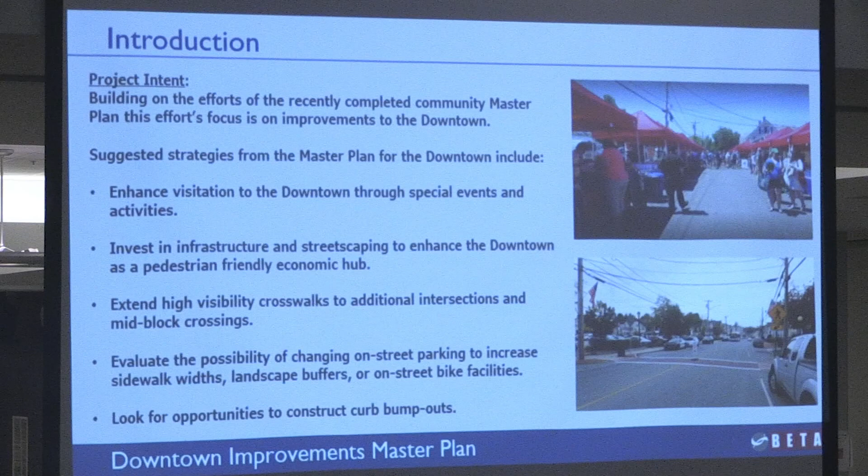The project intent is to come up with improvement schemes and a master plan for improvements to the downtown. A lot of that comes out of the community master plan you just recently completed, and within it there are elements that focus primarily on the downtown—strategies including enhancing visitation through special events and activities, and investing in infrastructure and streetscape enhancements for a pedestrian-friendly downtown.

Invest in infrastructure and streetscaping: extend high-visibility crosswalks to additional intersections and provide mid-block crossings. Evaluate the possibility of changing on-street parking to increase sidewalk widths and improve traffic flow, and also to possibly make the streets more friendly for biking. Look for opportunities to construct curb bump-outs.

Hire a consultant to evaluate and recommend for the downtown—you guys can check that off the box, you've got it done. We're here tonight to help you out.

Continue to plan for and implement the undergrounding of utilities—I'm sure you're all generally aware of that. Evaluate changing zoning to vary storefront setbacks to provide additional space at the back of sidewalks, to look for pedestrian gathering areas, green spaces, and wider sidewalks. Use streetscape elements—lighting, benches, street trees, textures to the sidewalk treatments—to create a more unified streetscape treatment connecting downtown to the Mill District, and add wayfinding signage.

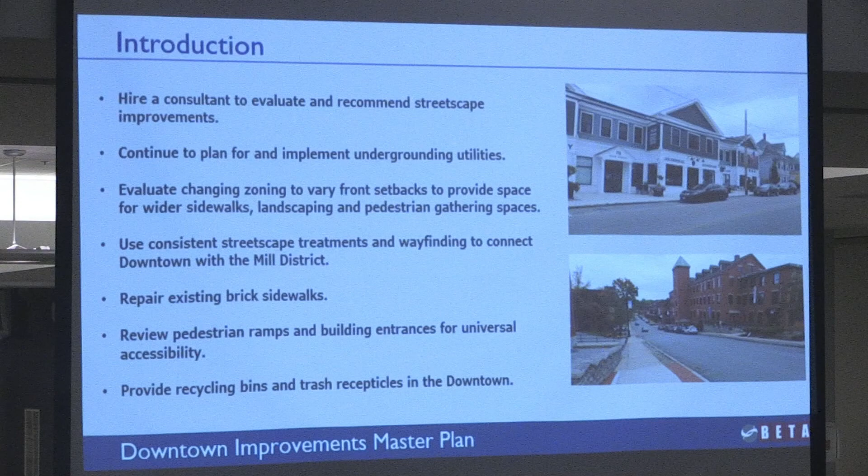Repair existing brick sidewalks. Review pedestrian ramps and building entrances for universal accessibility. That's a challenge because if you have two or three stairs going from the back of the sidewalk into a business, modifying the sidewalk to make up a foot of elevation is difficult, but when it's close, we look for opportunities to make buildings more accessible than they might be today. Also provide recycling bins and trash receptacles downtown.

So that's a quick overview of a general set of strategies that came out of the master plan. There's more to it than that—we really want to think about what would make this a vibrant and exciting downtown that would encourage both residents and visitors to want to go downtown. That's really one of the main goals and intents of this project.

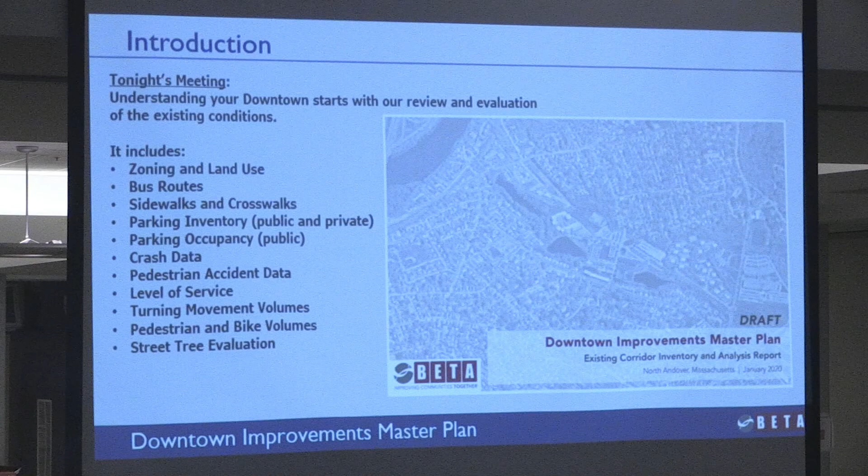We've gone through and created what we're calling an existing conditions document. It touches on a number of different things: zoning, public transportation, bus routes, sidewalks, sidewalk materials, crosswalk locations, parking, how parking is used, crash data for both vehicles and pedestrians, and level of service—how roadways and intersections operate. I'll touch on some of these in a minute, including turning movement volumes for cars, bikes, and pedestrians. We also looked at street trees, and since there really aren't a lot of street trees out there, we stretched it a bit—any trees within a few feet of the back of sidewalk, we evaluated the quality of those trees.

Tonight, what we want to do is get through the presentation and on to the part where we break out and get input from all of you. As I go through the next few slides, you'll see the kinds of things we look at, which in some respects are very technical in nature, but we really need to get an understanding of how you view the downtown and how it could be improved.

This is a general overview, same map as the one on my left as you walked in. We do look at zoning. The gray you see is general business. You can see a lot of an orangey color, which is residential, surrounding that. The project area also touches upon some other industrial types of zones and some nondescript zones as well.

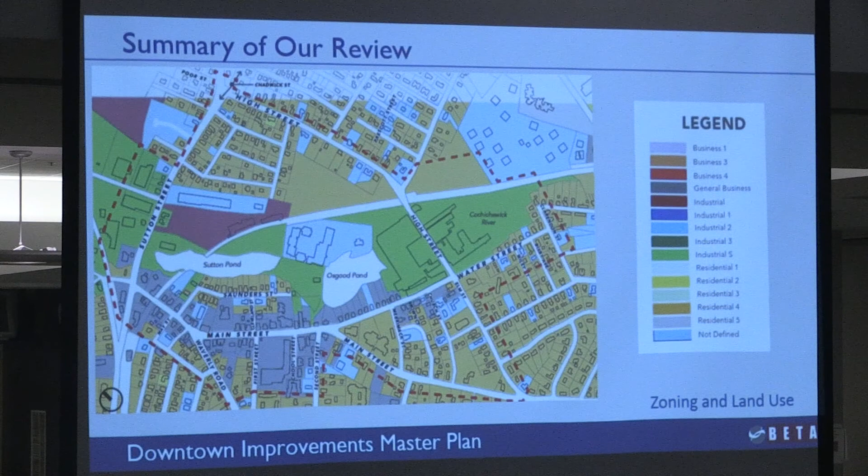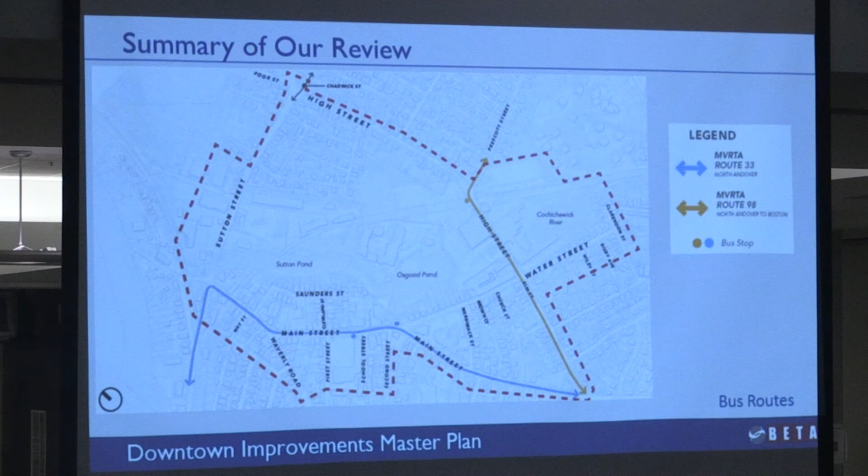There are two bus routes within our study area, and there are a few bus stops—a couple here and a stop here and there. That's something we want to make sure we consider, and it's also an opportunity. How can we get more people to visit the downtown if we made those stops a little more exciting and more accessible for users to get to the downtown and back to where they came from? That's an important aspect we want to consider.

Looking at sidewalks, we looked at the material of the sidewalk, crosswalk locations, and where bump outs are. The next step would be evaluating the quality of the sidewalks, where there are issues with heaving bricks or cracks or those types of things. We want to make sure we have a good understanding of that as well.

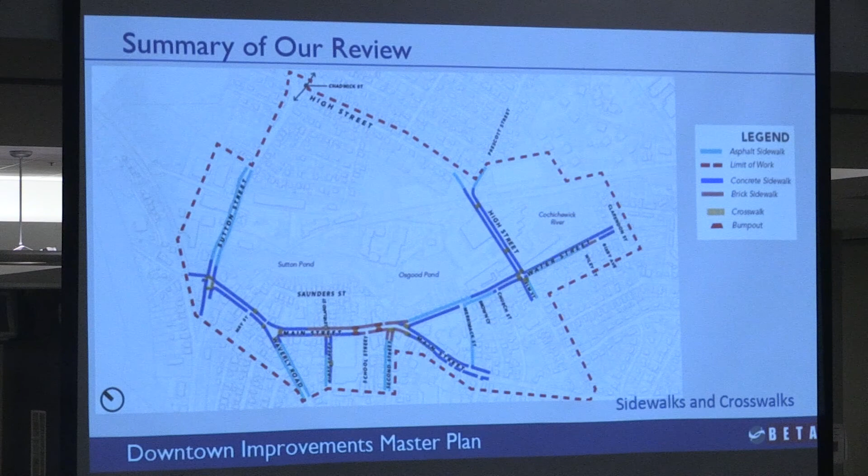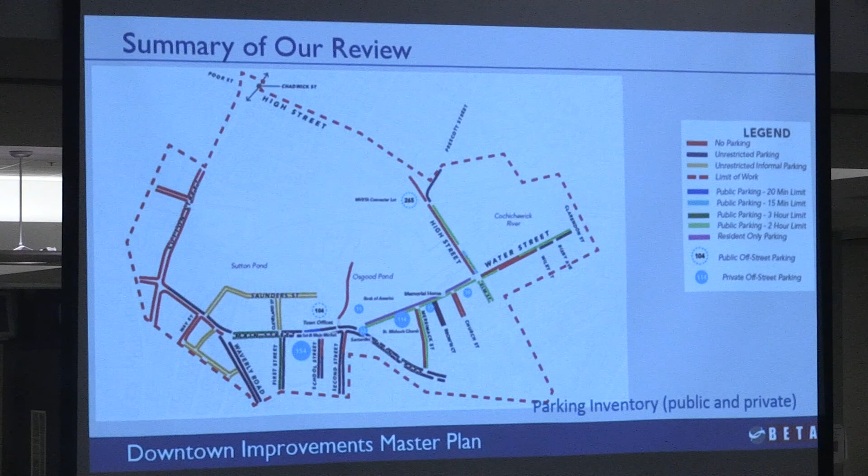Parking is typically a very important aspect of what we look at in the downtown—understanding where parking is and the nature of that parking. We've mapped the different parking limits in the downtown, where there's no parking, so that when we talk about streetscape enhancements, we can balance whatever we propose, which might include widening sidewalks, with maintaining a relatively equal number of parking spaces distributed through the downtown. It also gives us a snapshot of how the downtown is being used today, especially when we look at occupancy and understand how many spaces you have, the nature of the spaces, meaning their time limits, and how they're being used.

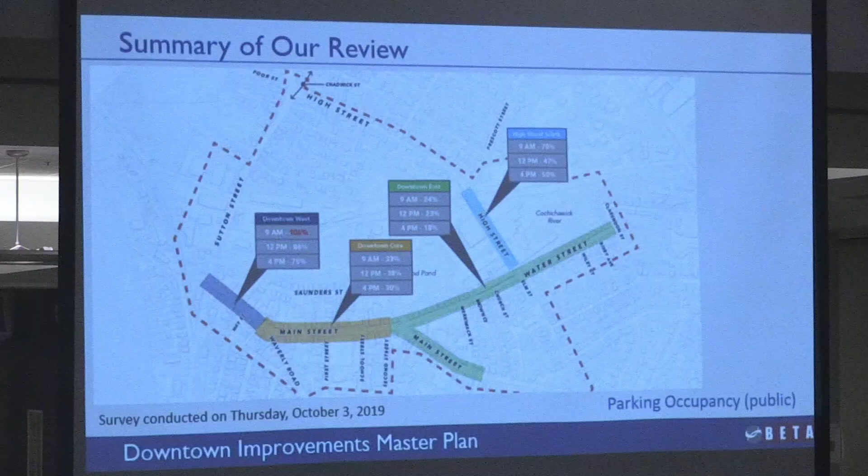This is just a snapshot from a survey conducted on Thursday, October 3rd. We looked at parking usage at three times during the day—9, 12, and 4—to get an idea of how parking is being used. This is an example of some really interesting information: you can see 106% utilization on the parking at 9 a.m. in the western limit of the downtown. Having walked the downtown a number of times, I assume that's Heavenly Donuts, with people stopping to get coffee. Getting an idea of other aspects of how parking is used, where people go, where you tend to find parking issues, where you can't find parking, and where parking is always available—those are important things for us to understand as well.

This is looking at accident data, crash data for vehicles, looking at data at intersections and along the corridors themselves. This starts to give us insight into where we might find problems with the geometry of the roadway, where cars may be traveling at a high rate of speed, or where turning movements aren't clearly defined, making it confusing for motorists. This is an important part of the information we've looked at so far.

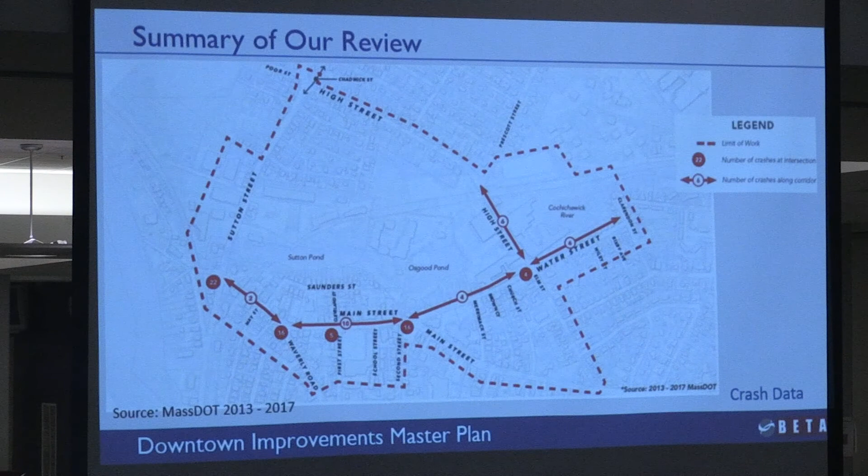Then this is level of service, a lot of data and information. It's basically a report card of how the intersections operate. We look at it during heavy use time in the morning and heavy use time in the afternoon, and it gets an A to F rating.

So it's not really about how good your downtown is. It has a lot to do with how it's used, like I said about the crash information, how well people understand how to make the turns, and whether there's a lot of volume coming out of one road into another that doesn't have much volume. You might end up backing up that road because it has a stop condition and has to wait for traffic to clear. So that gives us a snapshot of how people are driving downtown and where they might be coming from and going.

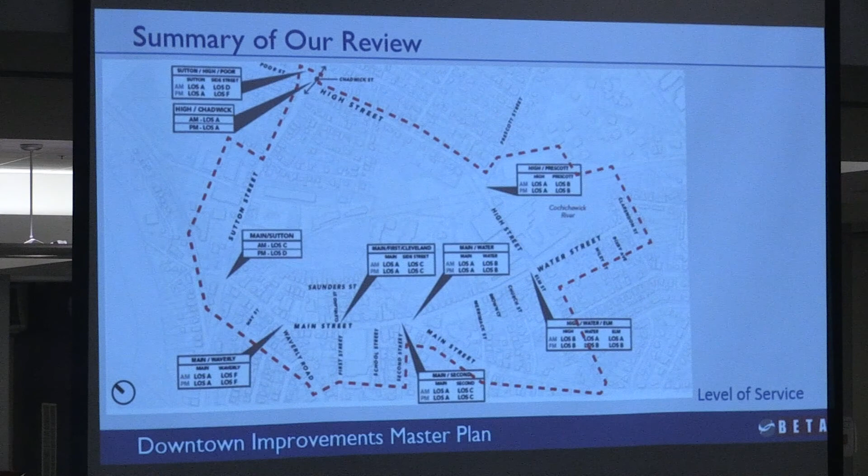I thought it was important to include bike and pedestrian turning movements as well. It's not nearly as interesting as for traffic, but it's another way to look at the volumes. One thing I like to look at is, when a downtown is surrounded by neighborhoods, how people might be getting there besides by car—are they walking, are they biking?

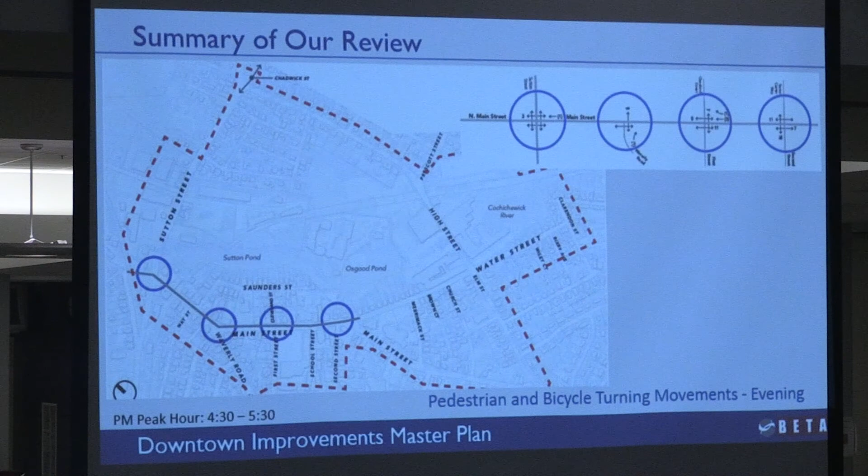This was done during the morning peak time and the afternoon peak time, in the core downtown area and also over by the mills, so we can get a sense of whether people are using bikes, and how often. The data is from around October, from Avalon—I forget exactly when it was collected—but it gives us a sense of whether people are using bikes to get to downtown, and to what level we may want to accommodate and encourage more of that under a proposed condition.

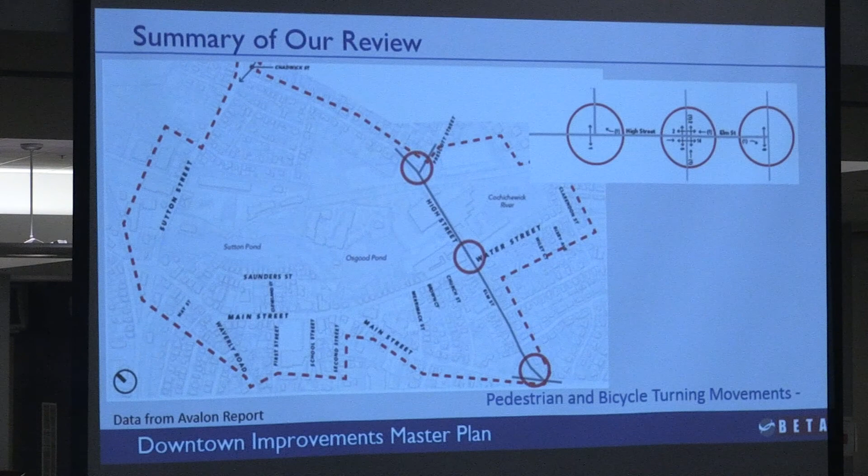Other things we look at when considering streetscape, parking, and pedestrian accommodations are the street widths—so are there opportunities, without major impacts to existing parking, to widen sidewalks and improve areas for pedestrians without significantly impacting on-street parking.

We're also looking at curb cuts—how wide is a curb cut opening? That's where a pedestrian in the sidewalk area feels least comfortable, being exposed to cars coming in and out of businesses adjacent to the street. There are engineering guidelines for accommodating vehicles and pedestrians, so we'd look for overly wide curb cuts and how we could narrow them down without impacting access to the businesses along the way.

So there are a number of these issues. What we're finding in a lot of places—and this is important for Main Street coming down the hill into downtown—is that the roadway is relatively wide open, a pretty wide roadway, without a lot of parked cars on a regular basis.

The combination of the downhill incline and wider road, and the land uses—meaning buildings are set back from the back of the sidewalk, unlike downtown where they're closer—creates a wide open feeling where people tend to feel more comfortable riding at a higher rate of speed. So one thing we look at is whether there are opportunities to narrow this down, or plant more street trees to create a vertical edge that gives visual friction and tends to slow people down. These are all important things we've been looking at.

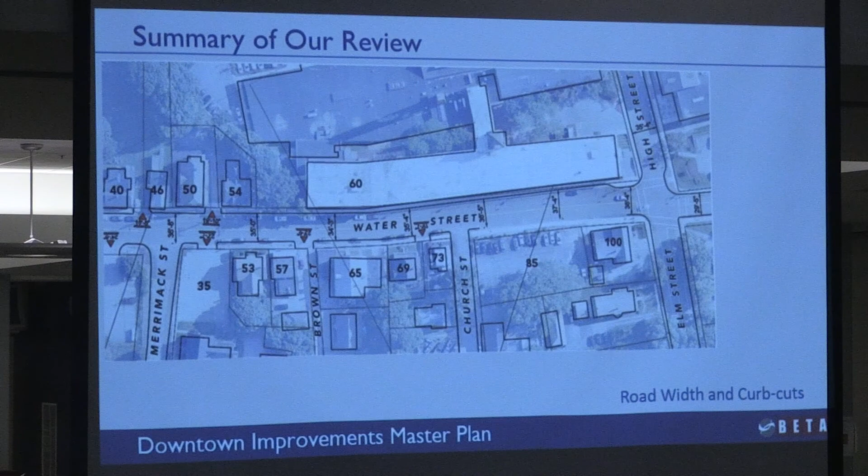We also start looking at where there might be opportunities for making changes to the sidewalk character. This is an interesting place because of how it's currently configured—whether we have opportunities to change the curb line to make it more of a conventional intersection, and look for opportunities to make pocket parks or pedestrian enhancements in wider areas. At all times we balance accessibility into these properties, understanding there's a reason it's shaped the way it is. Typically you find it's evolved that way—maybe there was a wider intersection at one point, and this was put in to give definition. I'm not saying that's the case, but often when you see a funky piece of curb line like that, it's evolved over time.

Looking at where sidewalks are currently wide, the green dots are where we evaluated the tree condition, so we get a sense of whether we want to try to save those trees or not.

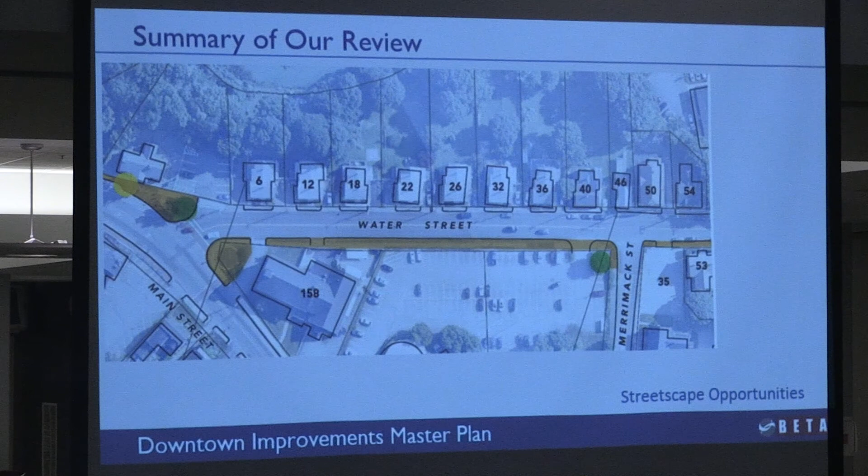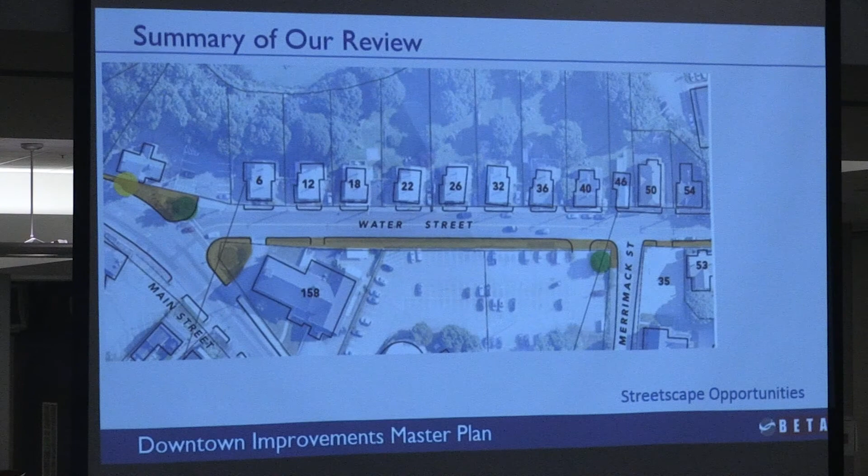Here again, this is by the church—there's a church, and you've got another interesting little intersection here. If the curb cut were one up here, this would be a really wide curb cut. So we're looking at whether there are opportunities to make some changes, modest as they might be, to how the curb cuts and curb alignments work, to try to make the intersections work better for both the pedestrian and the vehicle.

So I was going to turn this over to Jeff, but I don't know where he is right now. Oh, there he is—you were behind the pole.